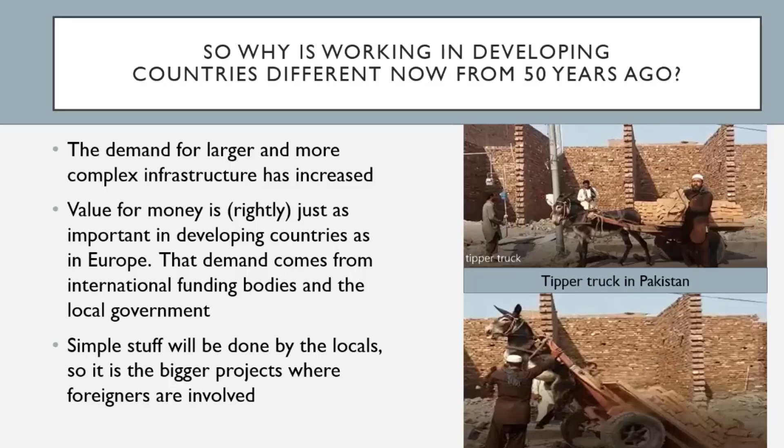And the big problem we have is when we then try and send our own staff into conditions like this. You cannot expect a local firm, whether they be pile driving for a building or building a big bridge, necessarily to change their way of working completely to suit the way that foreigners would hope. Language is obviously a major problem, but essentially it's an inbuilt culture, and the projects don't have the money to enable the safety steps to be taken. And life is cheap. You know, people die. It doesn't cost anything like as much as it would in London or New York.

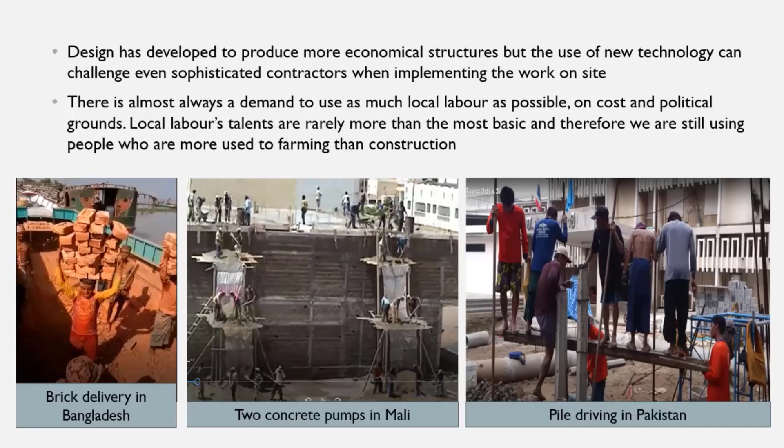And when you see, therefore, what bits of kit like that can do to enhance construction and speed things up and change the game, then it makes one realize that the whole form of construction, particularly for big projects, is completely different from that of the generation before us. But the workforce on the ground hasn't changed. They're still essentially, more often than not, farmers. They're much better at putting a goat's milk into a bucket than they are putting a high-strength bolt into a hole and tightening it up. And that is the challenge.

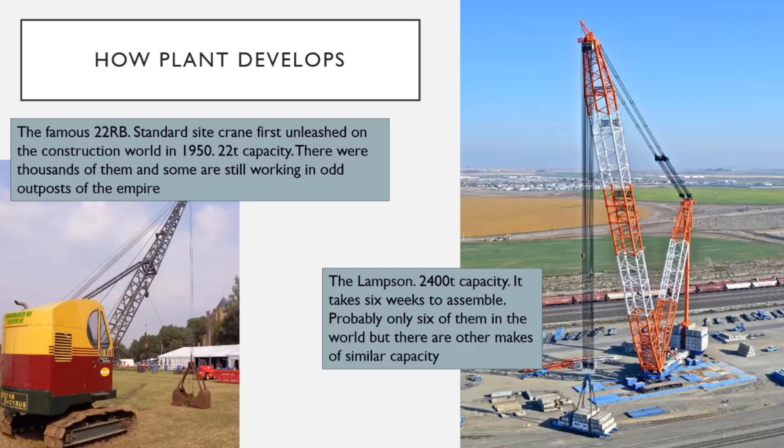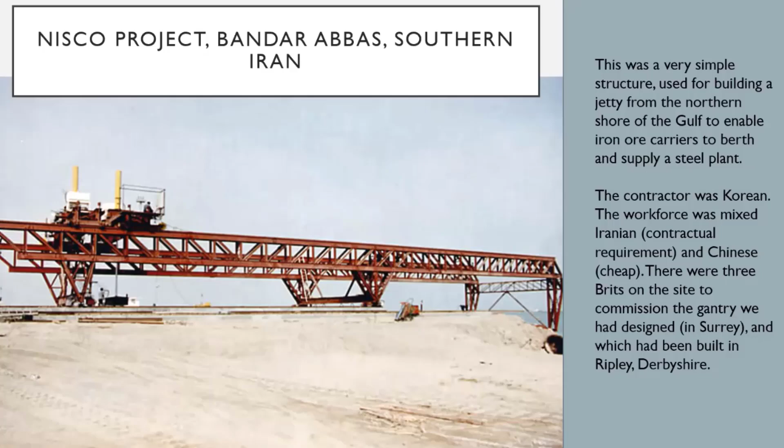So what could possibly go wrong? Well, I'll start to tell you that. The first was that getting to the site was tricky. The first time we went to the site, we went through Tehran, and I think crossing the main street in Tehran in the dark is probably the most scary thing I've ever done. When we send site staff out to sites like this, we say, don't do anything with which you feel uncomfortable. Well, I felt distinctly uncomfortable crossing the road in pitch darkness with traffic flying everywhere.

We flew down to Bandar Abbas at the beginning of July, and it was incredibly hot. The queue for immigration was snaking across the tarmac, and we were more than just a little bit relieved when a chap came out of immigration and said he would help us fill in the immigration forms, which was lucky because they had to be done in Farsi, and I can't even speak Farsi, let alone write it.

So he did that for us, and then announced proudly that his eldest son had a collection of paper money and he wanted to extend this collection. So we offered him paper money, but he decided he didn't like green notes and blue notes. He preferred red notes and brown notes. So that set the tone.

We then got to the site and found that the Koreans were nothing like as far advanced as they should have been. But again, it comes down to a cultural problem. Korean sites are very much controlled from the site, but they are monitored by their Seoul head office. And they couldn't afford to tell the Seoul head office that things weren't going particularly well. So they didn't tell them at all.

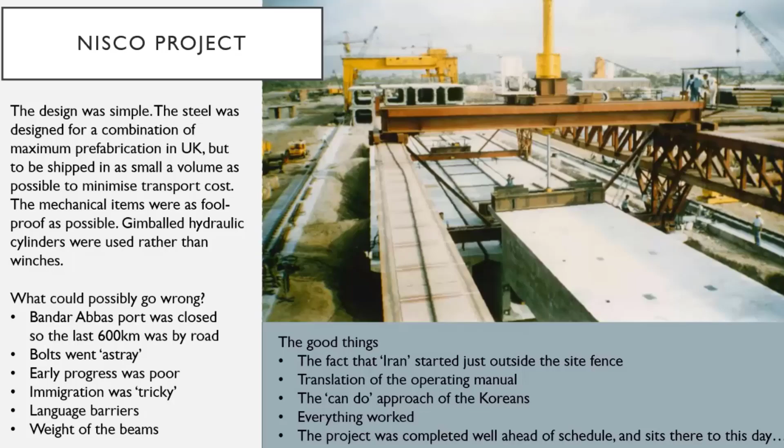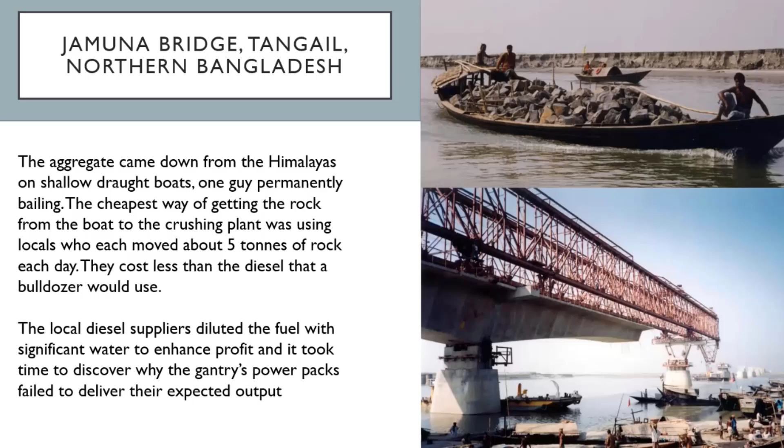Now, the diggers could probably have lived with that, but it did cause us a difficulty because the power packs on the gantry didn't develop the full power, and we had to get proper unadulterated diesel in to make that work. The machine was again designed in leafy Surrey, built in Ripley, Derbyshire.

This time, though, it went out to site in much smaller pieces because the volume to put on a ship would have been enormous. And so we were teaching the local guys not to weld, but to do up friction grip bolts, to get the geometry right. And they were incredibly fast workers, fast learners, bearing in mind, as I say, their principal expertise was with goats and cattle. And the thing went together remarkably easily and quickly.

At the time, this was one of the 2 largest bridge building gantries in the world, the other one being that used by Laing-GTM on Second Severn. And again, our principal reasons were to make it simple.

The principal philosophy that we have always used in projects like this is there are certain difficult things that you have to do, like the stuff on the right-hand side of this slide, which is the match casting, and that is a complicated thing by first world standards, let alone by third world standards.

So that is something which the locals would have a hand in terms of placing rebar or pouring concrete, but in terms of geometry and setting the whole thing up, that was done by the foreigners, not us initially, but then the Koreans, and we stayed with the Koreans until they were good at it. And of course, being Koreans, they then became very good at it. And then it became repetitive.

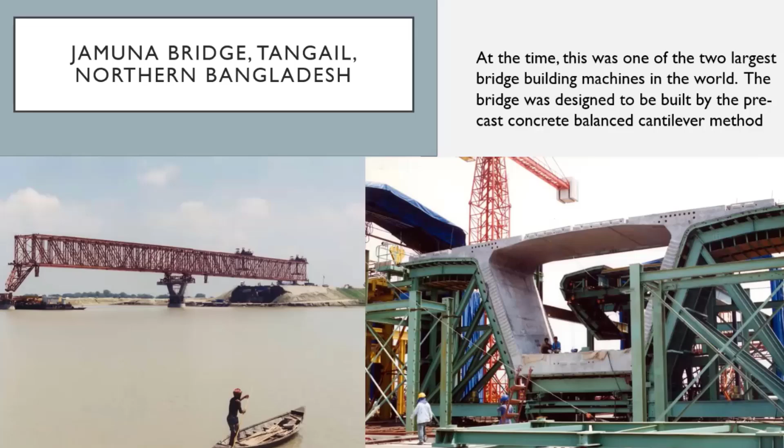Second Severn didn't suffer from that problem. And they never really achieved the production rate from the casting yard that they had hoped for or intended. But the gantry still worked well. It erected all the segments it could be fed. The charge hands very quickly realized that they had to work the operation in the sequence as defined, because frankly, otherwise the machine would fall over.

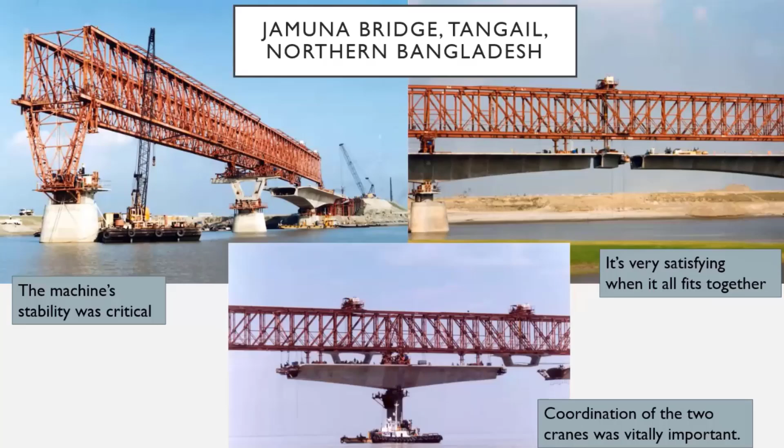And if this lot fell in the Jamuna River, which is, as you probably know, a tributary of the Ganges, and it comes and goes all over the place, then something will go badly wrong, and the project will be stopped, not for months, but for years.

I should say that although the bridge was expensive, it was not as expensive as the river training works, because being a braided river, the Jamuna can move around in its valley, and it would have been very frustrating to build 5 kilometers of bridge to find the following season that the river was no longer underneath it. So the river training works were a bigger part of the contract than the bridge. And actually the foundations for the bridge were a bigger part of the contract than the deck.

The first time we started the launch, we had a briefing session for the Koreans and some of the senior Bangladeshis. And they went off out to site and they started, and it's strange because we went through the door and they seemed to forget everything they'd been told and people were flying in all different directions. So we brought them back in again, went through it all over again. And this time it went well.

And they began to get great satisfaction from seeing things fit together at the allotted time. And all of a sudden, magically, and we've had this with machinery like this all over the world, instead of being Steve's or Tony Gee's gantry, it becomes their gantry, and productivity goes up by 30% because they've got ownership of it.

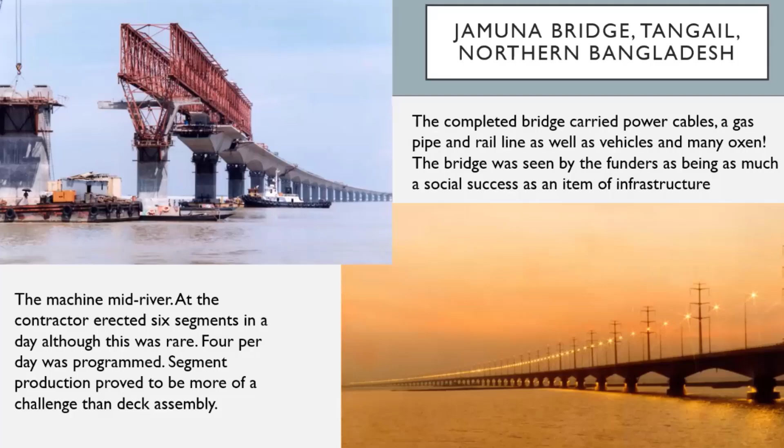More remote still. This was a project promulgated by a gentleman called Mr. Batulga, who had already funded the building of the model of Genghis on his horse, which is on the steppes well to the east of Ulaanbaatar. It's in the Guinness Book of Records as being the largest sculpture of an animal. It is immensely popular. You climb up through the back legs of the horse and go through its body, and you eventually climb up to a viewing platform over the steppes on top of the horse's head.

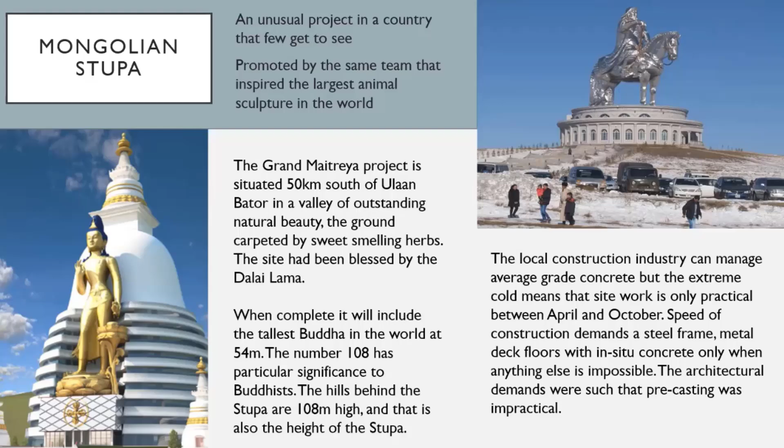This project was different for us because we were never going to have much in the way of helping them to build the thing on site. The construction of the project was not that difficult. There were certain complications in that they wanted to get the Buddha built as quickly as possible, because that was going to bring the visitors in and would raise funds. And they couldn't do that. We demonstrated that they couldn't have the full Buddha without being propped at about waist level. So they had to do things in a sequence.

But essentially, we designed the thing. It had already been designed once by a Chinese company, which was unbelievably inefficient. They must have been on absolute minimum fee, or not having any interest at all in structural efficiency. But we knew UB well enough to know the technology that they could employ there. They obviously knew structural steelwork, they knew concrete metal deck, they could even post-tension concrete if it was necessary. They have post-tension concrete bridges in Mongolia.

They also have an extremely short building season, because it's too cold to build outside from about October to April. So doing as much work in preparation as possible is really important. So the thing was designed to be built easily using their technology and without assistance from us. And indeed, that is what they've done.

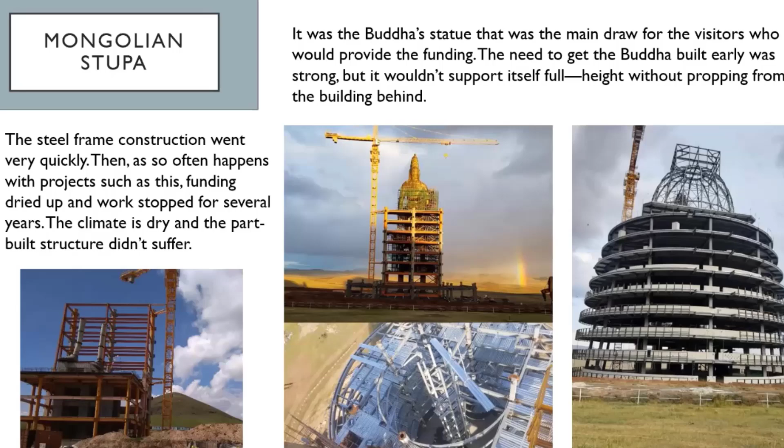It will be a magnificent structure when it's finished. As you can see, it sticks out a very long way. The Buddha was cast by the same company as made Genghis and his horse, and they did a simply fantastic job of it. And I would recommend it if you happen to be passing, which I have to say is unlikely. The project eventually ran out of money because they were hoping for funding from rich Chinese. But sadly, China fell out with the Dalai Lama, and the Dalai Lama had blessed this project. And so funding stopped for quite a long while. It's now going again.

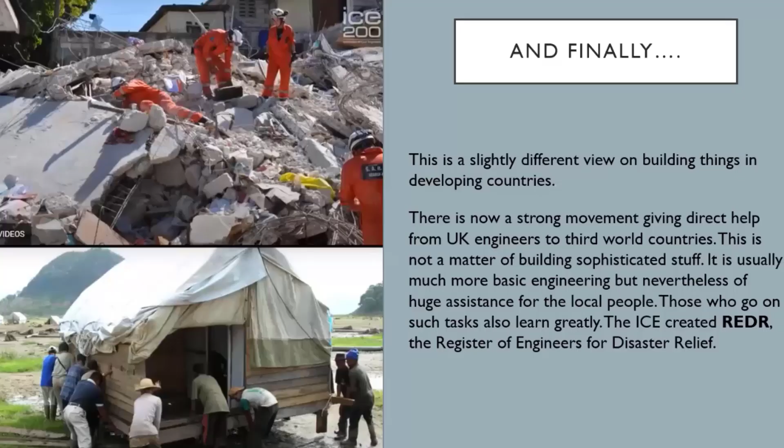But the alternative is Bridges to Prosperity, which I believe is of American origin. And I have to say the firm has taken this on since I retired. They take junior staff to wild places, in this case, Rwanda. The volunteers came from us and another UK contractor, Knights Brown, and they built a bridge. This river had killed children while trying to cross it during the previous flooding season.

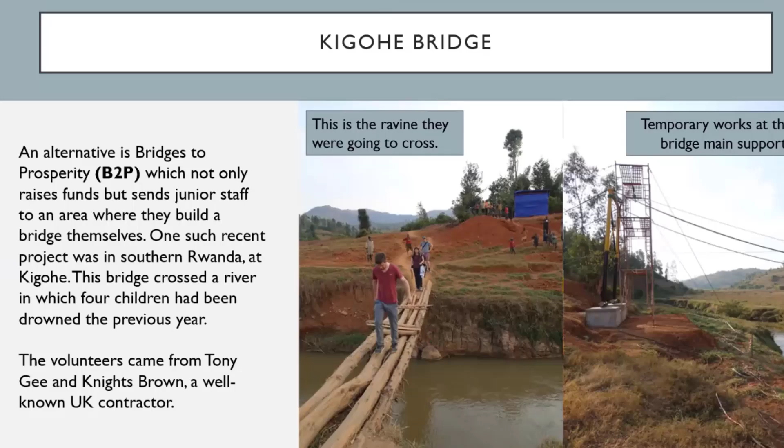They designed the temporary works, they designed the construction engineering, the safety parts were reasonably good. And the bridge was intended to carry a cow, but it obviously carries a great deal more than that. And although it does considerable benefit to the local community, I think actually the guys and girls who went to site probably came away with greater benefit from it than even the people who use it now.